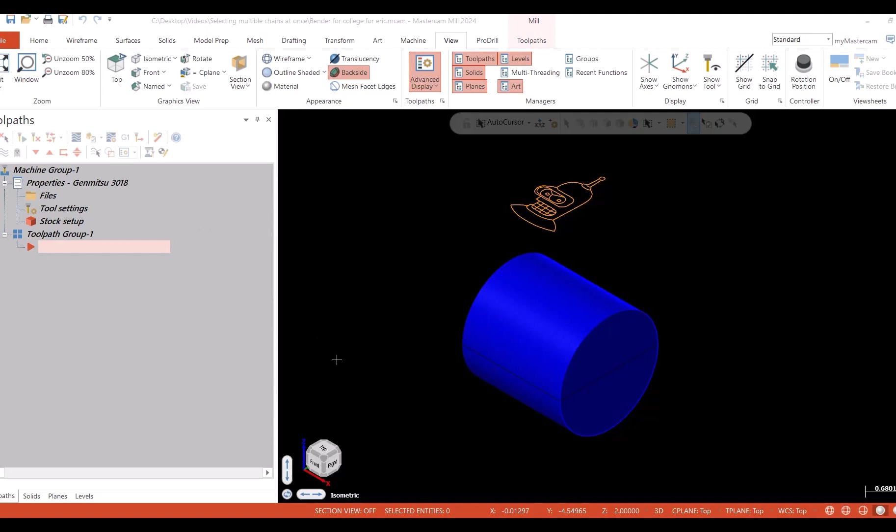Today we're going to talk about projecting 2D wireframe onto a 3D surface model, then coming back with a 2D contour cutter path and machining that same part.

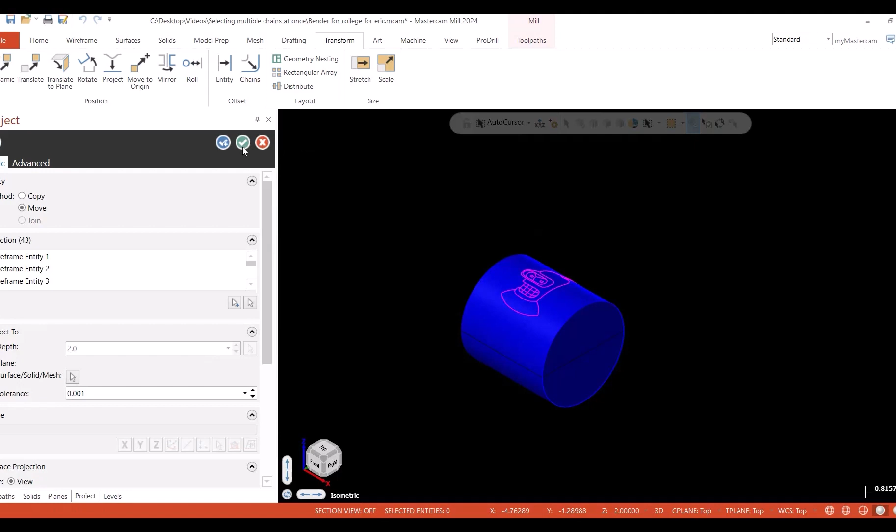Let's get started by selecting geometry we wish to project. I'll make the selection of my 2D wireframe. We'll accept that. We're going to select Move. We're going to select our surface and/or solid model we wish to project to. Hit the green check, and we've projected that geometry down to the surface.

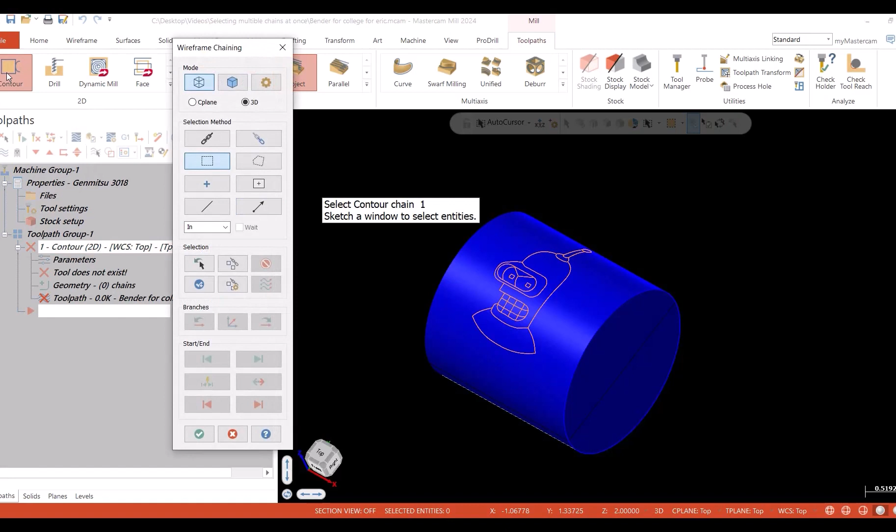I like to clear the colors so I get a little bit clearer contrast, seeing what I'm actually going to cut. As you can see, that 2D flat wireframe is now 3D wireframe. Let's go to Toolpath. Like I said, we're going to select a simple contour cutter path. We're going to make a group selection of the wireframe, so we're going to select Window. We'll window around the whole model. Accept that selection, give it a start point,

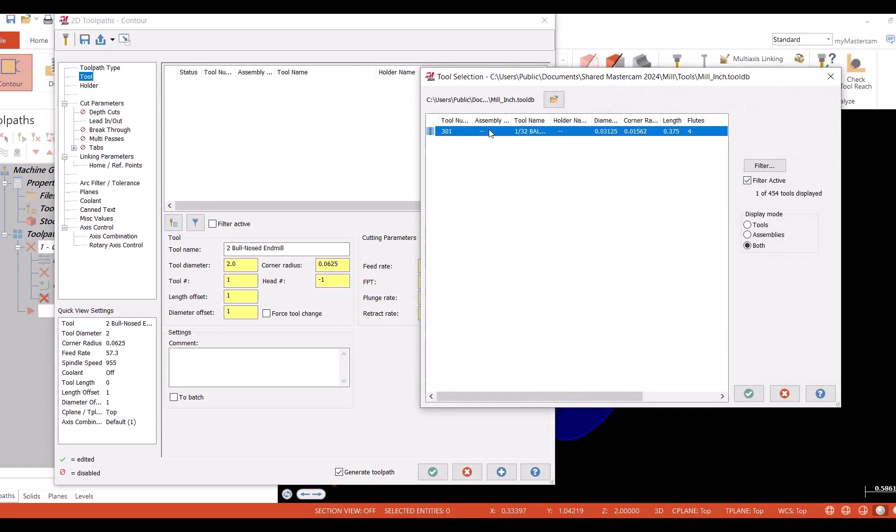into the cutter path. The tool I'm planning on using for this would be a ball nose end mill. Because we're going to engrave, we're going to use a 1/32 ball nose end mill, which happens to be the smallest I have in the mill inch tool library. We'll set our speeds and feeds. We're going to set our plunge rate, and I like to use rapid retract.

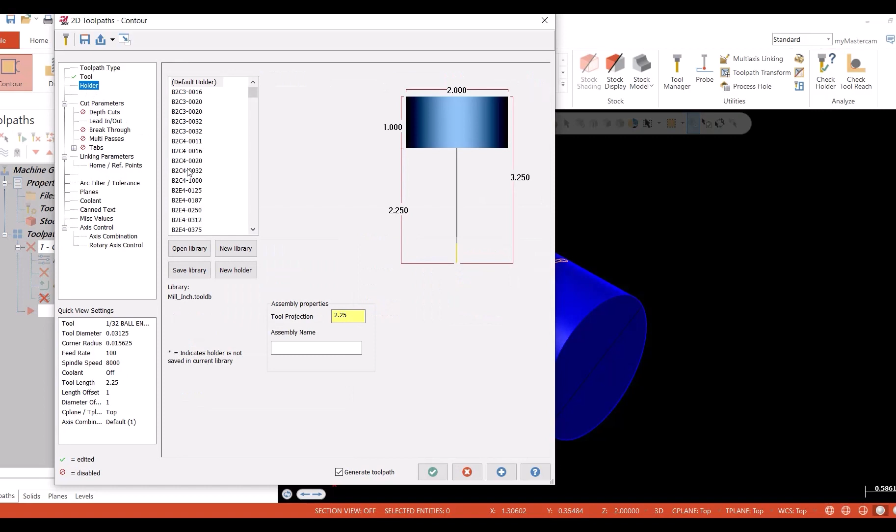Let's go ahead and grab a holder. This isn't one I'd like to use. I'll use this one instead. We'll set our overhang length. Go into our cut parameters. Make sure our contour type is 3D.

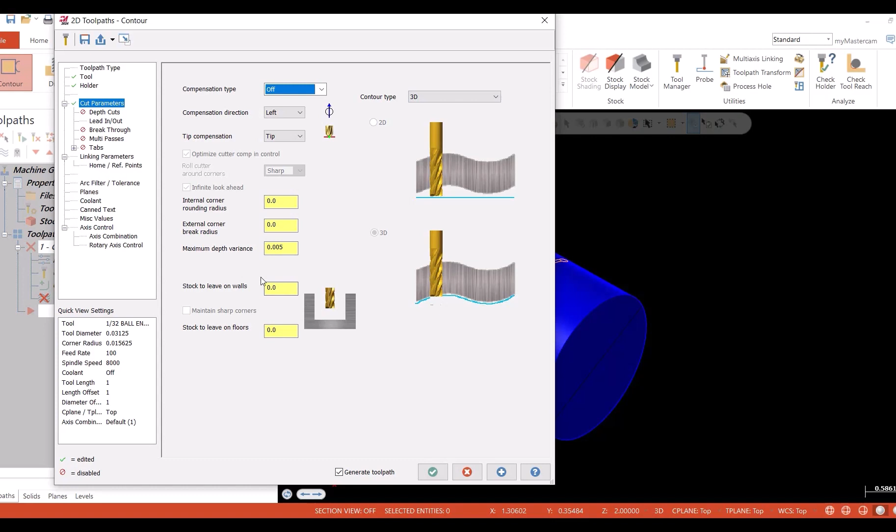We are going to turn off our compensation as we wish to run right down the middle of the wire on our model. We'll turn on depth cuts, so we're not going to be taking it all in one pass. I'll set it at a number that makes sense for my machine. I will turn off lead in, lead out because I have a ball nose end mill.

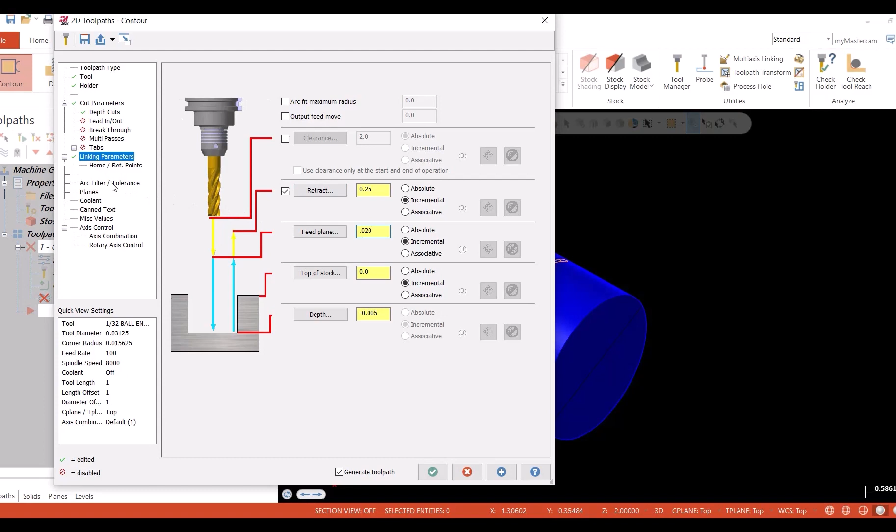My linking parameters, I'm going to set it to an incremental depth, in this case of 5 thousandths negative. I'm going to set my top of stock to 0 incremental, so from the geometry, a feed plane that makes sense and a retract rate that makes sense. We'll go into our arc filter, make sure our cut tolerance is set to something that makes a little bit more sense, a little tighter for a better finish, and we'll hit generate.

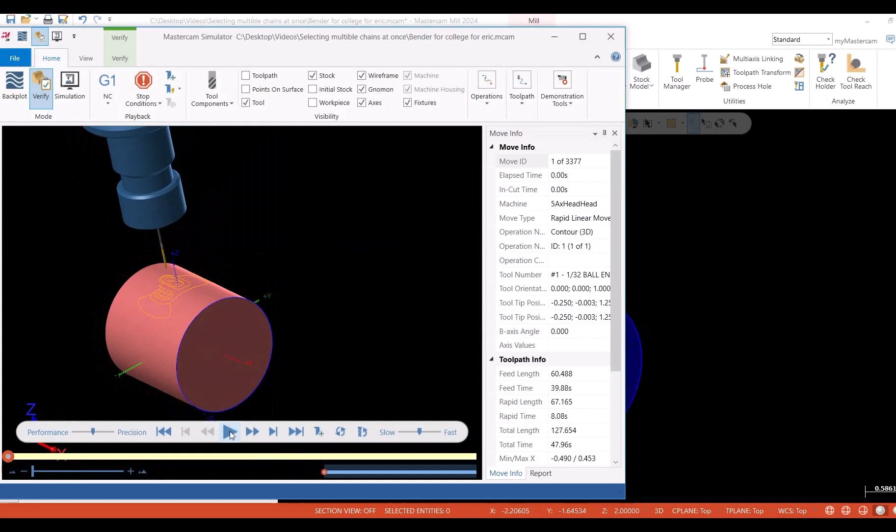And there's our cutter path. Let's go ahead and check out what we've done. So we're going to go to verify. There's my holder, there's my cutter, and we're going to hit play. That was a little bit fast. Let's zoom up on this again. Let's rewind it and come back a little bit slower.

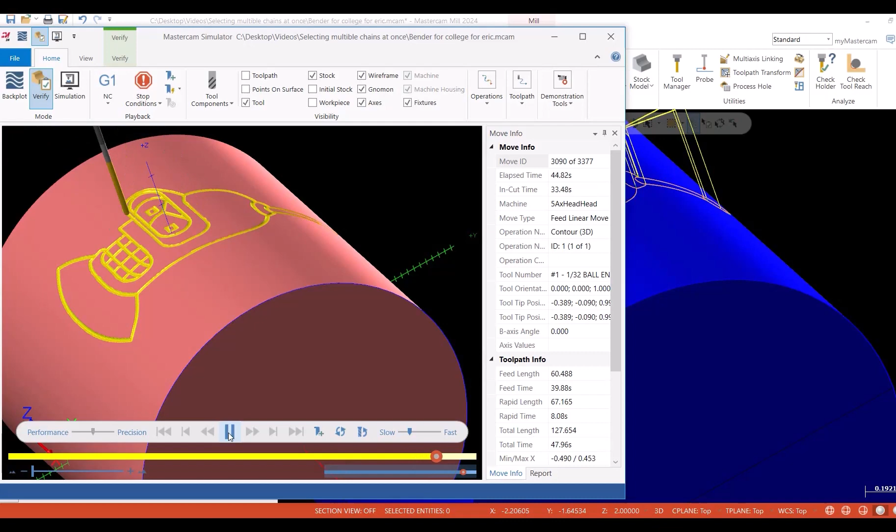So we adjust our speed by the slider bar, hit play, and now we're cutting. This is just a wireframe contour cutter path, 2D in 3D mode. As you can see, it works at everything from a constant Z and engraves our little guy. And that's really all there is to it.